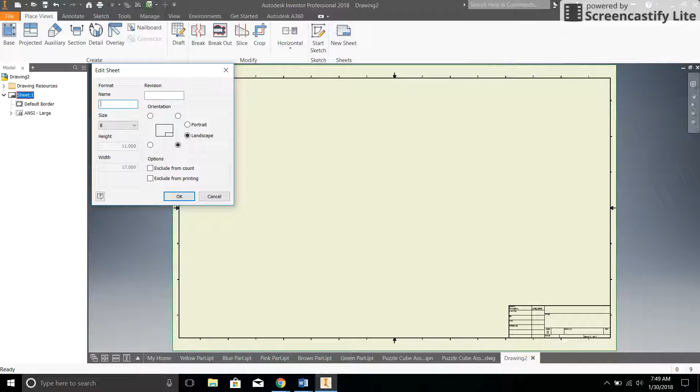So this is a DWG, so I'm going to open up a new DWG to start. This was on a B-size drawing, and B-size, like we're going to see here when I go to edit sheet, is going to be 11 by 17, so it's a little larger. All right, I'll call this puzzle cube assembly.

I want to go ahead and change the border and title block to ANSI A. Although ANSI large fits fine, I'm going to just stick consistently with ANSI A. I'm going to make this 4 by 4. There we go. So now I have my drawing.

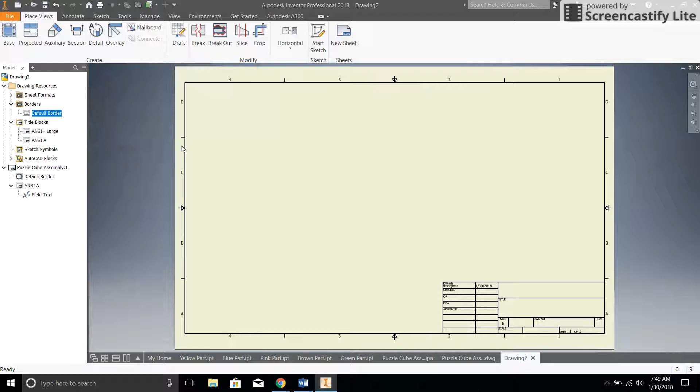Okay, so how do I get these drawings on there? So again, I want to remember what it looks like. I have 2 assemblies, I have a presentation, and then I have parts list and balloons. Okay, let's get to it.

All right, so I'm going to bring in a base part just like normal. Instead, though, of bringing in my presentation first, I'm going to bring my assembly. I'm going to find the view that works for me. So let's see, I always start off with the front view.

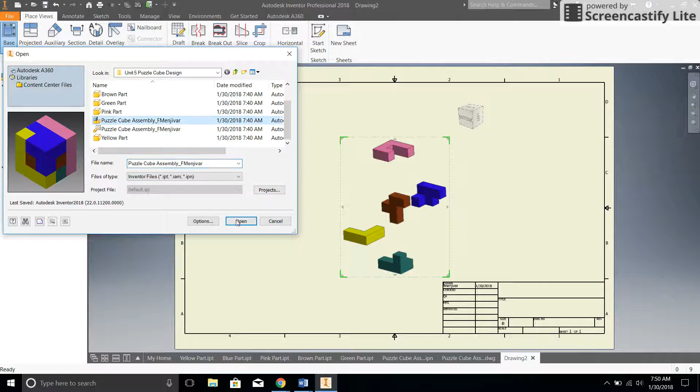Find the assembly, open, find a view that works. There's the front, I'll tilt it on the side. I'll make it 1:1 because that's too small. And then that's a good placement for it. So I'll right click and I'll click OK.

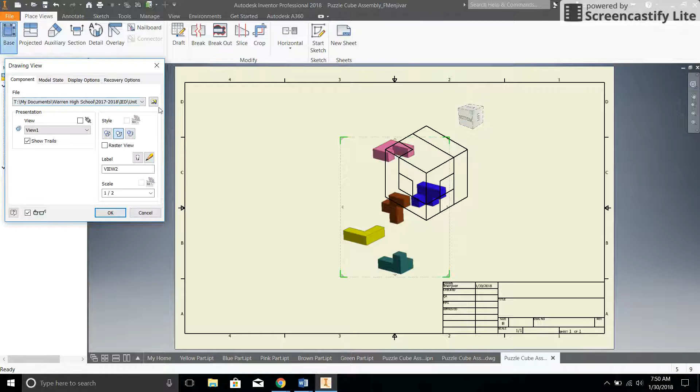I'll do that again with the same part. I'll start off with the back, and then this time just put it at an angle. Again, 1:1. 1:1, there we go. Right click, OK.

Now when I make both of these colored, you should be able to tell that one's the front and one's the back, although that's up to me. That looks good, so I'll move this one slightly just to give it a little room. Pink in the front right here, pink in the back right there, so yep, they're opposite sides.

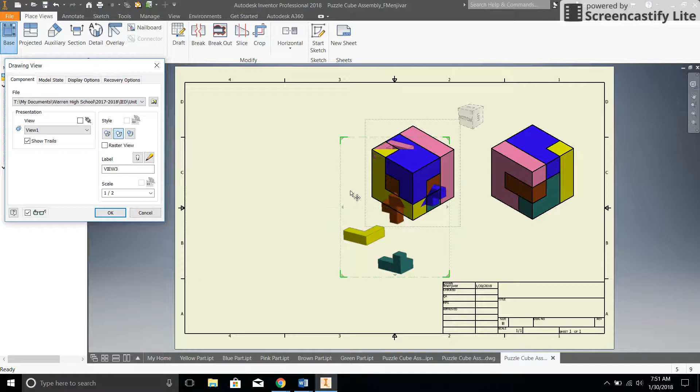Okay, now I'm going to do the same with my exploded view. This I just found, the exploded view. You can actually pick which view you want to show. I'll go ahead and go with view 3. Just so you guys know, this is something I've never talked about, but you can actually save views.

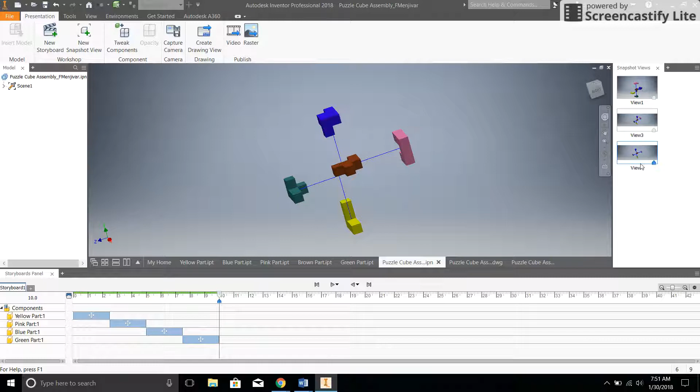One of the things you can do is, let's say I move it around and roll it like that, right? I can go ahead and get that, I could right click and take a new snapshot view, and that's now my view 4, so that when I place this, I can select which view I want, and it keeps the view that I like. So I liked view 3, so I'm going to keep that. Instead of 1:4, I'm going to make it 1:2.

That looks good, I'm going to make it colored. Great, awesome, there we go. And I showed the trails. All right, cool, so I'm going to move through this pretty quickly because I want to get to some key parts. All right, so now I got the 3 parts in.

Now it's a matter of getting the balloons in. I'm going to do them one by one. I'll click on a part, and it says, hey, the source is this assembly. That's correct, so I'm going to do parts only. This assembly, I want to designate each individual part.

Okay, bill of materials, great. So I click once, I click twice, I always like to make them leader lines, then I right click and continue. I do this for each one. Once, twice, right click, continue. You'll notice it's already pre-numbered, based on your assembly and the order you placed the parts into the assembly.

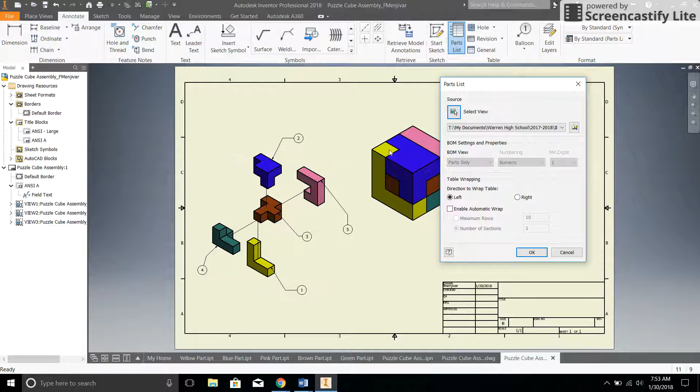Okay, great, so I got the balloons done. Now I'm going to create the parts list. I'm going to select the view, this is the view I want the parts list from. Do I want to enable automatic wrap? Yes. If there is more than one word, I want it to wrap around and make a column, just like Excel or any table you create. I want it to be left oriented. That's good, I'm going to place it on the top left.

I'm going to lock it in that corner. And there we're good. You'll notice that the item and the quantity is there. The part number is only there because that's what I call the part number.

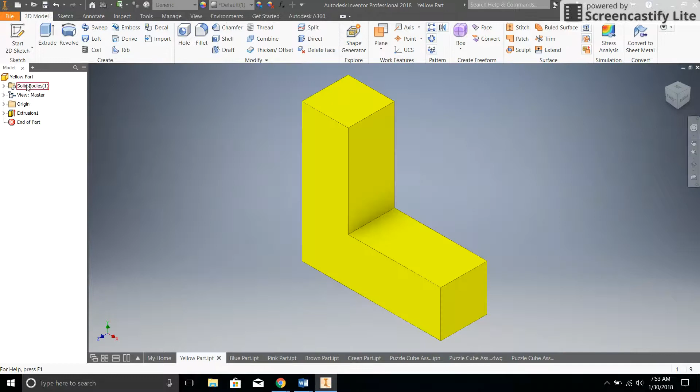Hardwood cube, why does that show up? That's because each of the parts under the project, I called it yellow part. So if you want to modify the name, do it now. If you want to change the description, hardwood cube, I capitalized it, hardwood cube. So each of the parts has that written on there. If I go to properties, it says hardwood cube, and then blue part, and that updates here.

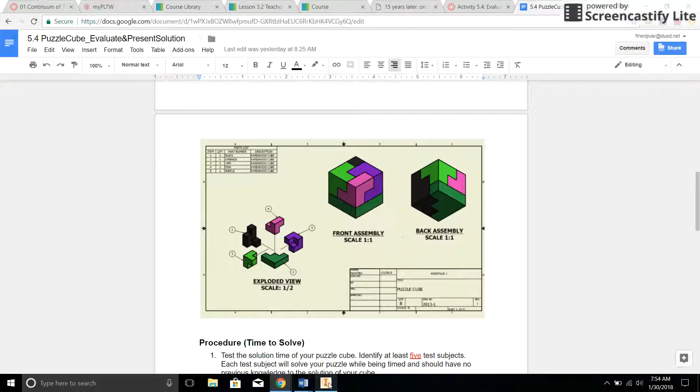Almost done with this. Last thing I got to do is annotate it with text. So just draw a box. I think of my end goal, what do I want it to look like. Okay, front assembly, back assembly. So I'll type in front assembly.

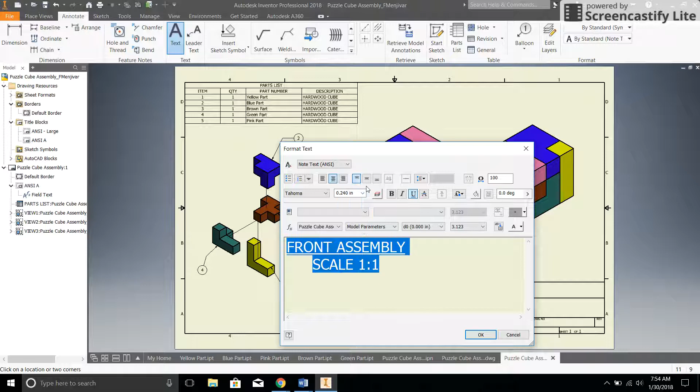Then the scale for this one I remember was 1:1 because I set it. I want this one to be centered. I wanted the front assembly text to have an underline, and I want it to be taller. I know I'm going to need it to be taller for this drawing. I'll make it 0.24, centered, great. Looks good.

Now all I can do is move it to the right spot. I right click, I copy, I paste where I want it. I'll paste it there too, because I know I'm going to need it here. Cancel, this one's slightly down.

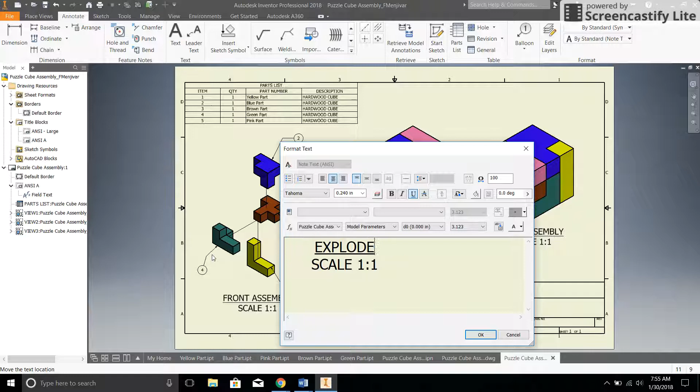Double click on it. This was the back assembly. And this was the... what did I say here? Exploded view. This one wasn't 1:1, it was 1:2, meaning half scale.

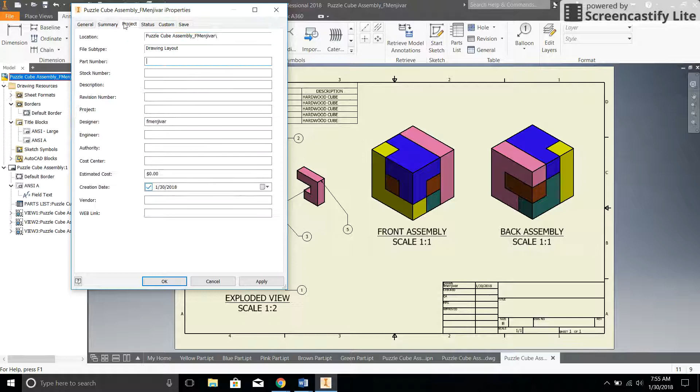And that's good. Last thing I got left is the title block. I have properties, this is a quick one. I'll say Mr. Menjivar, title is the puzzle design challenge. And then project, let me think... well, once I save this project, that will automatically update. So there we go, that drawing number is going to update as soon as I save it. Otherwise it's good. If you want to do more with the title block, you always can, but this is all I'm expecting, and that's the end of this one.

Pretty quick demonstration.